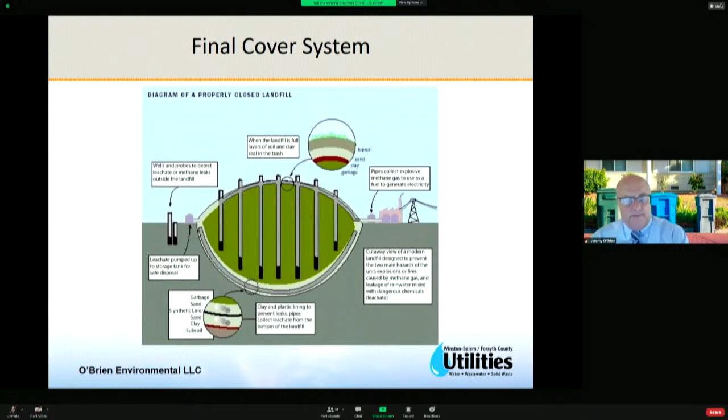The good news is that our SWANA research, in the report I mentioned earlier, found that traditional final cover systems, if properly managed, can last for very, very long periods of time — on the order of thousands of years. So that's really a good news story: if you close this correctly, you should be protecting the environment for many, many generations to come. Next slide, please.

Well, what about post-closure care? Now you close the landfill. What federal and state law requires is that you monitor what happens at the site for 30 years. So if you closed in 2041, for the next 30 years, you would monitor the groundwater at the site, the leachate, landfill gas, and how the site is settling.

The purpose of this time frame is to make sure the landfill becomes what they call functionally stable. That's not a psychological term, that's a physical term — functionally stable during the 30-year period. What does that mean? Since water can no longer get into the waste, waste biodegradation ceases, and once that happens, the landfill gas generated will be minimized, and the landfill settlement will be minimized. So you think of this landfill, it's kind of just settling down.

All the landfill gas is stopping being generated. A little more leachate is being generated, minimal leachate generation. So at the end of that process, it's kind of done, if you will. It's kind of going into retirement, ready for retirement. All the processes have ceased. And I want to say that the utility department is also accruing monies for a reserve fund to cover these post-closure costs.

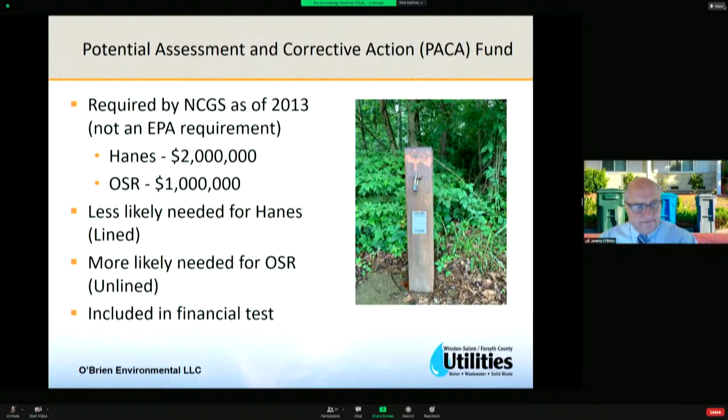A restricted fund is not being accrued for these long-term costs, which are way in the future. For a 100-acre site, we estimate it would cost just about $25,000 a year. These aren't large costs, they're kind of minimal. You send someone out to walk the site every year or so, fix any potholes, that type of thing, and make sure the final cover system is functioning correctly. The good news is you can likely cover these costs with interest earnings from the post-closure fund.

To help the Solid Waste Division track post-operational costs with Hanes and OSR, O'Brien Environmental has developed this CPCC fund model. The model is used by the Utilities Department for budgeting annual contributions to the Hanes and OSR closure and post-closure funds, and it's also used by city finance to provide cost estimates for the local government financial test. A model like this is needed because each year the inputs change a little bit, like the amount of waste disposed in future years, which modifies the service life of the landfill. Costs also change based on inflation, so there's a need to rerun the model at least once a year to update it.

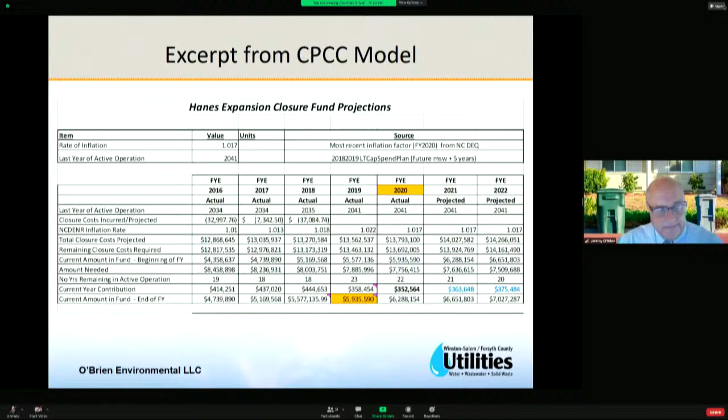To summarize these costs and give you an idea of how big they are, when we looked at the entire Hanes landfill, closure costs came out to $1.32 per ton of waste disposed, post-closure 79 cents, PACA cost 21 cents, for a total of $2.32 per ton of waste disposed at the site. Most of the costs are associated with closing the landfill, about a third with post-closure, and a little less than 10% with PACA. There might be some additional costs for long-term management and beneficial reuse of the site. That $2.32 is about 8% of the current cost of disposing of waste at Hanes, so it's not a huge cost, but it's not insignificant either.

I hope we're at the fun part of the presentation. These landfills have served the cities of Winston-Salem and Forsyth County well for many years. The question for the commissioners is, can the closed landfill continue to be a community resource? It's really centrally located, and that's important for the city of Winston-Salem's waste collection trucks. Should it continue to be used as a recycling center, a transfer point, a waste drop-off center? That's one excellent use if you decide to do that.

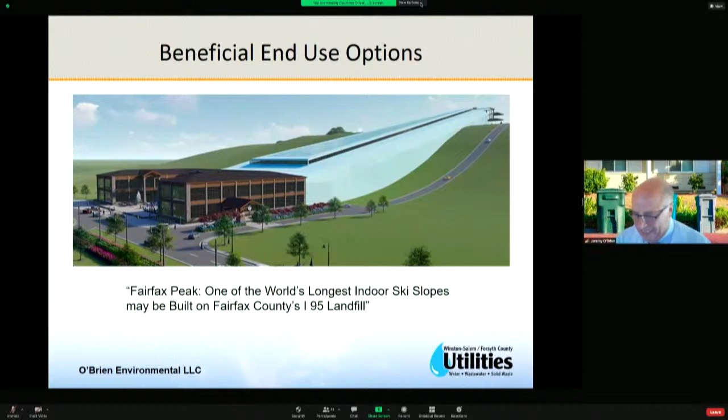But somehow skiers have discovered our industry, so you may get some developers approaching you to do something like that. Okay, Courtney, next slide please.

Just to summarize, closed landfills will require maintenance and monitoring for many years, both during and well beyond the 30-year post-closure care period specified in the regulations. It's just the nature of the beast - it's something we're going to have to take care of for many years. The good news is that only a minimal level of care will be needed once the landfill becomes functionally stable.

Post-operational costs, as I've hopefully demonstrated, represent about 8% of the total costs of landfilling waste. The utilities department is accruing funds to cover both the closure and post-closure costs for Hanes and OSR, and to date, over $20 million has been accrued. I think that's a tremendous achievement, and future residents will be glad that you're well on your way to covering these costs. Finally, additional funds may be needed for long-term management and beneficial end uses, especially if you decide on the ski slope option. So with that, I'm finished my presentation, Courtney.

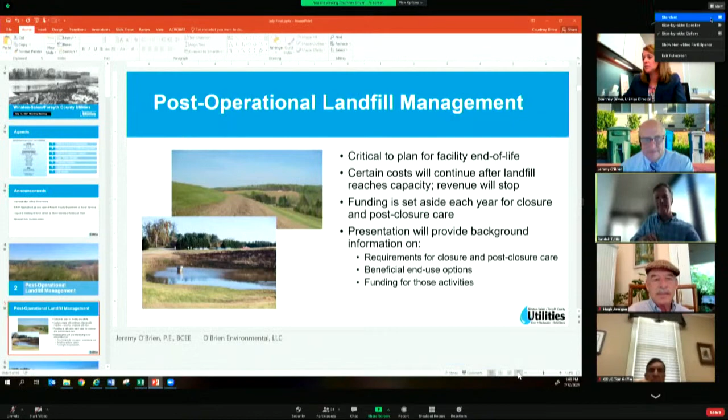Okay, I'm going to turn it over to Mike Stover. Thank you, Courtney. Good afternoon, commissioners. So far this calendar year, Todd's group has issued 31 water and sewer permits for an infrastructure value of over $4.6 million. This slide shows the breakdown of mileage between water and sewer permits - about 5.7 miles of water has been permitted versus 7.3 miles of sewer.

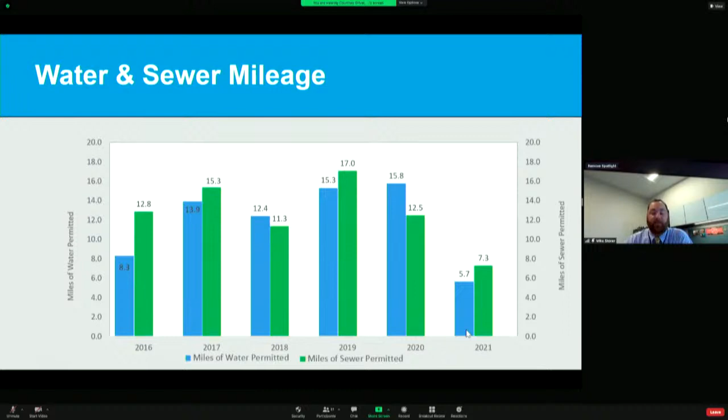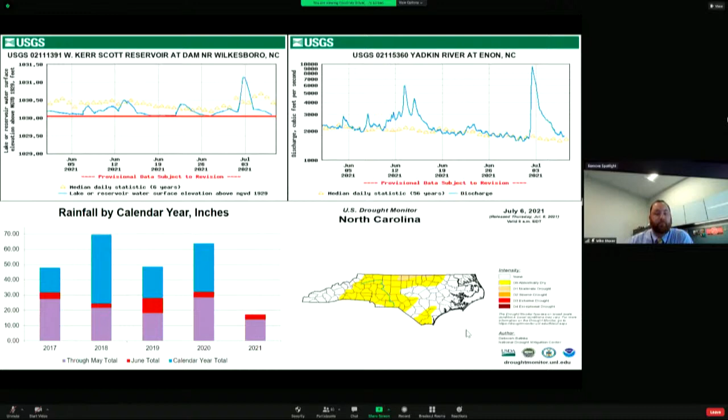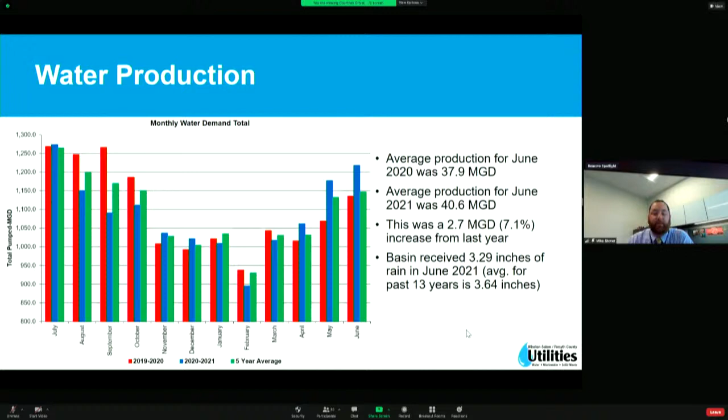Here's the drought monitor. As you can see in yellow, the middle part of the state is abnormally dry. In June, we had 3.29 inches of rain, which is slightly below average, but we are substantially below where we were this time last year. Water production in June was really good compared to the 5-year average and compared to last year - our water production was up 2.7 million gallons per day, or about 7% over this time last year. Here's the fiscal year to date, still slightly below the 5-year average and below where we finished last year.

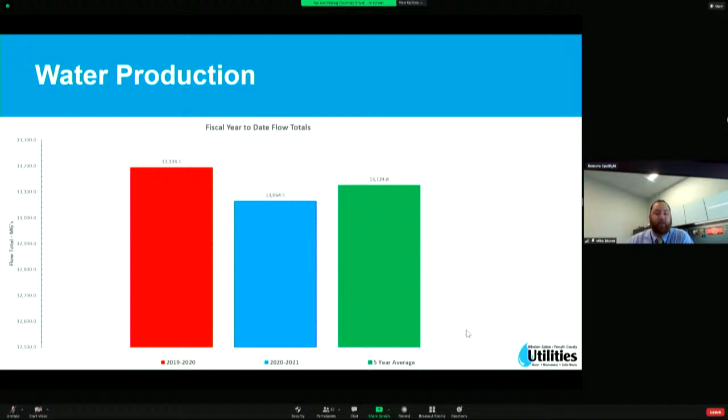Water quality sampling for the month of June - across the 3 water plants, we conducted over 26,000 water quality samples and fielded 61 water quality calls. No violations. I would like to point out we did have 1 positive total coliform in the distribution system at one of our regular sampling sites. We went back 24 hours later and tested again and got a negative result.

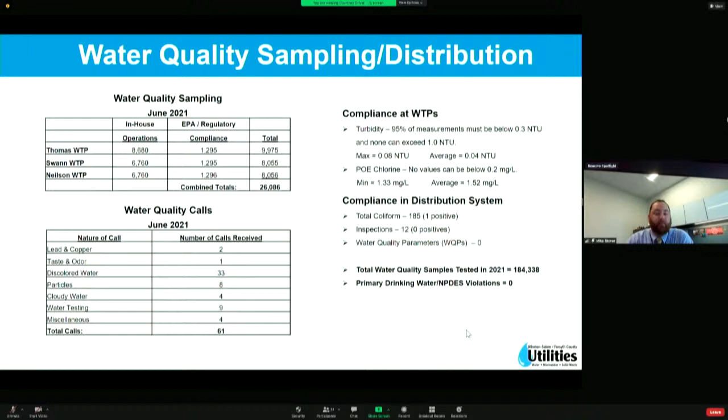Collection system update. We have not received the report for June yet, but we did get the last couple months, March, April, and May, since we presented this last. For May, we had 1 notice of deficiency, 3 notice of violations, and 0 intended enforce letters. We've gotten a couple of intended enforce letters over the past couple months, dating back to December, when we had a large spill on our Tanglewood force main. The penalty was about $5,800, which we paid.

SSO per 100-mile chart: we had another record year. We finished exactly where we were last year, 74 SSOs for 2021. Considering the pandemic and a lot of people working from home, our field operations still came in every day. They were short-staffed, and we've had staffing shortages on our contractors as well. It was a remarkable year.

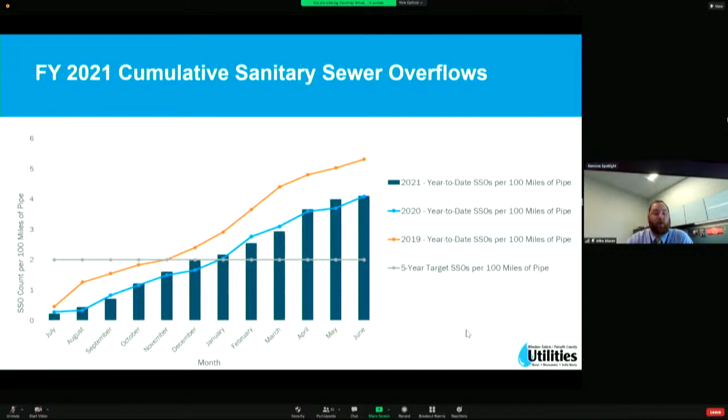A large part of that is we had a good month in June. We had 2 SSOs — one was a pipe failure, and one was fog, roots, and debris related — way below our 5-year average mark.

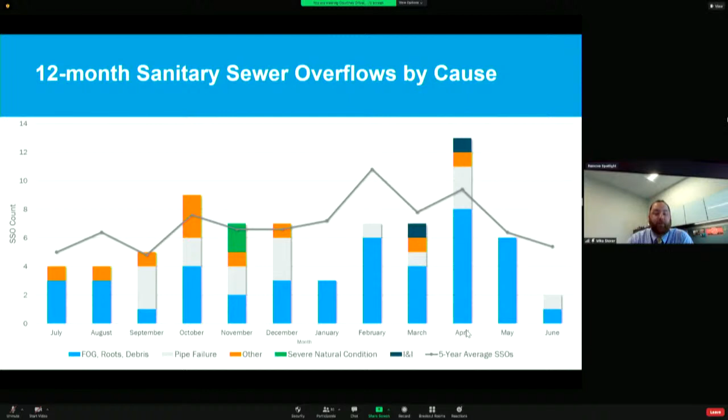I'd like to point out we did recently renew our collection system permit, and it runs through, I think, 8 years, through 2029. That is a huge achievement. Kenny Atkins and his staff have worked tirelessly to get that permit prepared, and that was done well in advance of the deadline.

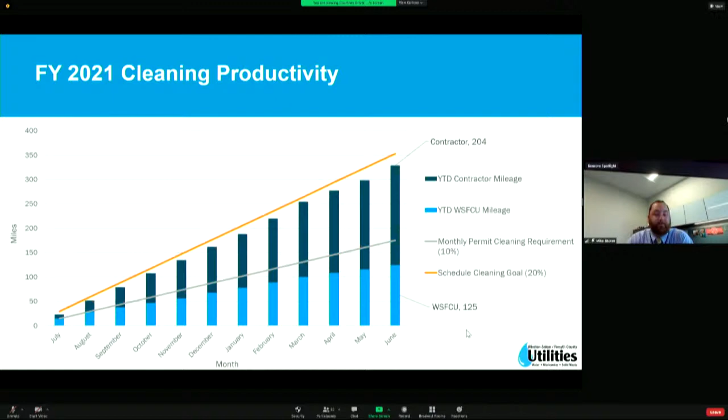Items 5 and 6 on your agenda are the Neilson modernization project. We've briefed you all on this several times in the past — March of 2019, and I believe February of this year before the capital presentation. As a reminder, the Neilson water plant is our largest water treatment plant, 48 million gallons per day. There's only been 2 major expansions since the plant was originally built in the early 60s, and I believe those 2 expansions occurred in the 80s, late 80s.

This project includes condition improvements for aging facilities, process improvements, obsolete failing equipment replacements, providing some redundancy and reliability, and safety and operational improvements. It does not increase capacity, though.

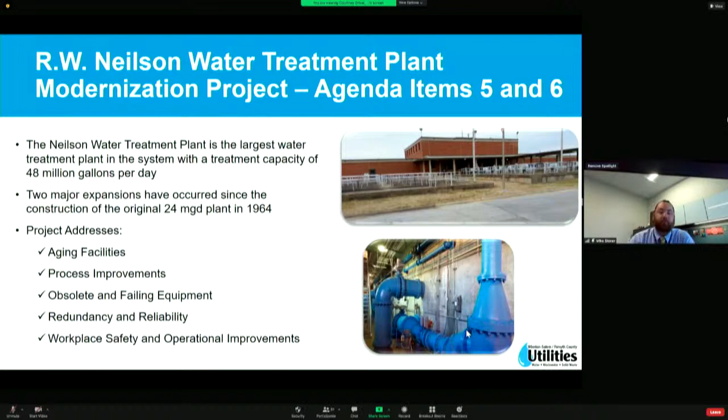Here's a snapshot of the budget. The commission approved an additional $40 million in the May commission meeting to go towards this project, for a total appropriation of $121.87 million. So far, for preliminary design and bidding, we've spent a little over $5 million. Item 6 on your agenda is the construction administration contract, $7.247 million. Item 5 is your construction award for Oldman Schutte, a little over $107 million, and then we left $2 million in there for contingency in case anything arises during construction.

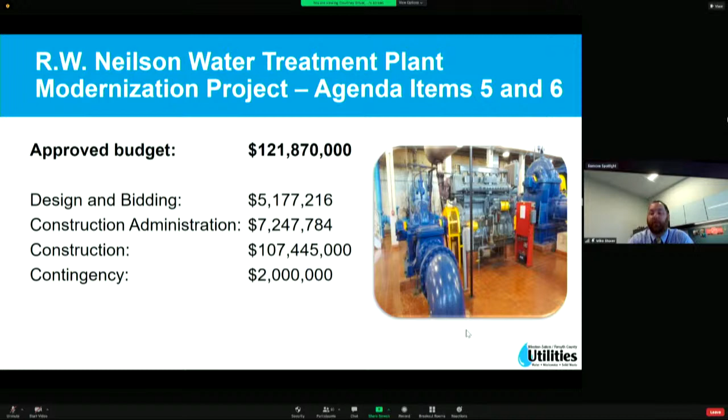It was going to be done by CITI anyway as an allowance, and rather than having the contractor go through CITI and add their markup, we already have an existing contract with CITI. We removed that from the Neilson project, and we're going to do that completely separate through the water treatment upgrades program, similar to how we did Swann and Thomas last year.

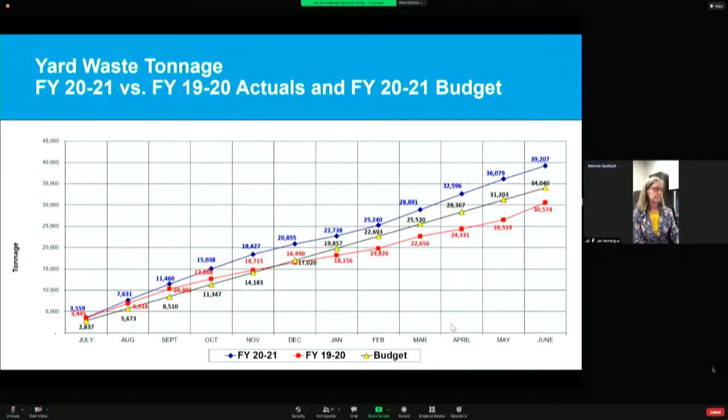That's our usual tonnage update for the solid waste facilities. And we had one more thing that we wanted to discuss with you today.

This map shows various parcels surrounding the Old Salisbury Road landfill. And let me walk you through what the map looks like. The red boundaries, the parcels that are outlined in red, are the ones that are currently owned by the city.

So the cross-hatched one that you see at the entrance to the landfill is the 1.1 acres, I think it was, that was on the agenda last month for discussion, where there's a couple, a developer that would like to purchase that property. That item was tabled, but we wanted to show you where that's located relative to the rest of the landfill and make you aware of another parcel.

It's outlined in orange on this map that has become available for sale. It's about 32 acres and it's priced right now at $249,000. It's immediately adjacent to the landfill, as you can see, and would provide another access to Old Salisbury Road in that rectangular piece that goes out and has road frontage.

So it's currently zoned residential. As I said, they want $249,000 for that. And we feel like there could be some benefits to owning that parcel that's adjacent to the property that the city already has. It would provide a buffer from the landfill operations to the nearby residential areas.

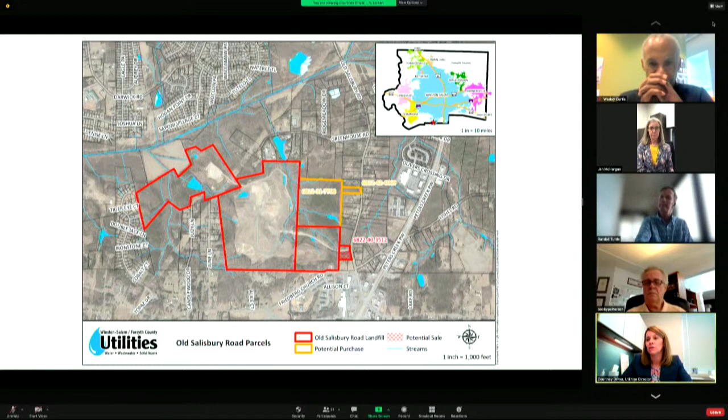Courtney, what do you need from us? Well, I guess I need some direction on, does the commission want us to bring it back as an agenda item next month?

I think I'd be amenable to that. I'd like to bring it up as an agenda issue. I know the one reason we tabled it was because Jan was not available. And thank you, Jan, for sending me all that information on the hydrogeologics, which made me feel a lot better because I wasn't sure about it then. But I've got a little more information as far as groundwater flows and all. I feel a little bit better about it now. Plus, certainly would like to bring it to the commission about the purchase too.

So if I may suggest, let's separate the yellow box from the red hash box. Yes. I'm sorry, Chris, or someone else that wanted to say something. Yeah, it's Chris, right? Randall, right as you were saying that, I was saying that the sale makes this even more attractive because this could help pay for a good part of that purchase. So that intrigues me and makes me more in favor of this.

I know it would be two different agendas. I had an unstable connection, my internet broke up, so could you say that again? I know it would be two different agenda items, but I would be interested in seeing both of those on the agenda, both the sale of this piece of land and then the purchase of the other one. Me too. I'll second that, or third it. Okay.

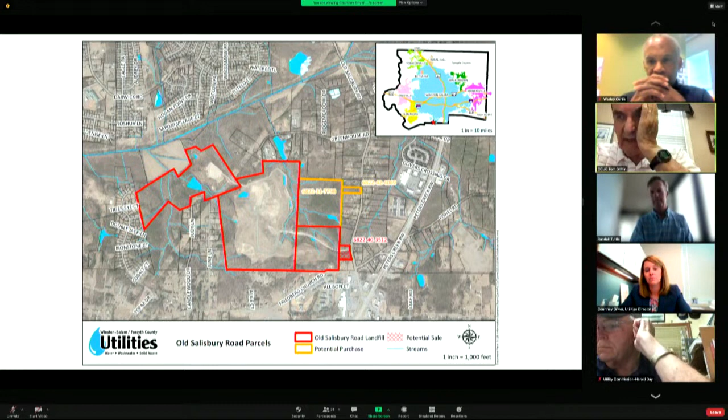Courtney, make sure that we see the language in the document related to the item we're looking at selling, possibly related to the buffers. I'd like to know all of the details about what's going to be in the actual legal document, as to the wording that's going on there. That's sort of like Wesley said a while ago. Yeah, we feel good to start with, but somebody 20 years from now has heartburn over the thing, and we're sitting here trying to figure out how to solve that problem 20 years from now.

Yes, we can do that. Okay, and I would like to echo that.

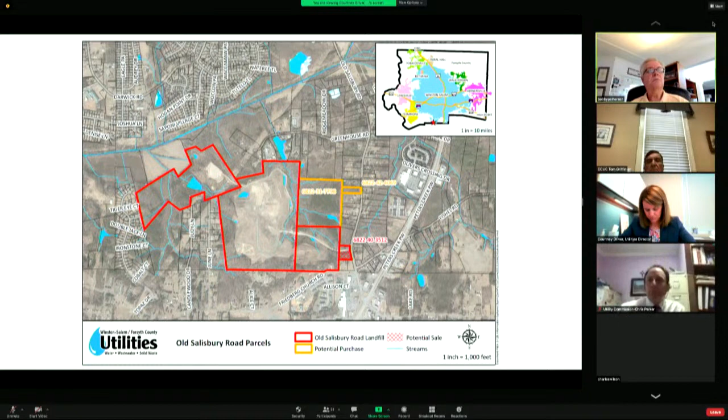Do you know what the uses will be, or how you're going to try to market the uses?

It would typically be the typical split you would see in a retail center. I'm sure there'll be some service type uses. There'll probably be some straight up retail. There may even be some food related items, et cetera. So a typical mix, I would think, you would see in a small retail center.

And this is Chris Parker. I'm assuming, since this is so close to Peters Creek Parkway, that we do have sewer out to this piece of property.

I'm sorry, Mr. Parker, so you're saying you want to know if we have sewer in Old Salisbury Road? No, just that piece of property that you're pointing out that we're thinking about selling. Because I would imagine if we don't have sewer, then that expands what's necessary. Do we? Especially if you have a restaurant.

Yeah, I don't know off the top of my head, and we'll try to get that for next month too, unless Mr. Patterson knows. The Davidson County line is very close, so I don't know if we serve that area or if that's Davidson County. I'm not sure right now.

We do have a survey of the property, and I know there's some fairly significant development immediately across Friedberg Church Road. There's a retail center there, and there are 2 restaurants immediately across Friedberg from us. So yeah, I don't know whose service territory those fall in. We'll have that information as well. I'm just not sure - there are some properties that we serve outside of the county line.

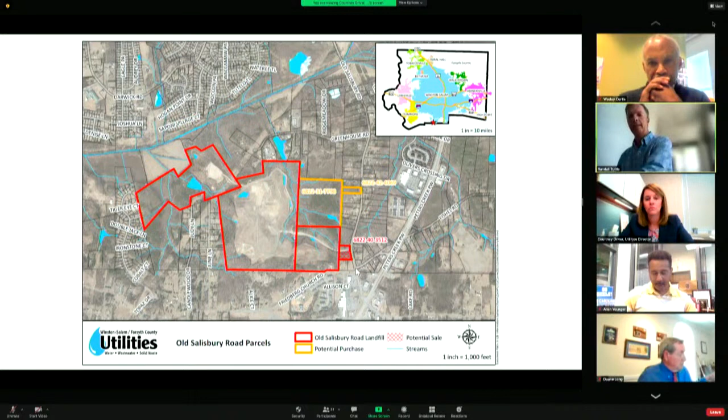Want me to just take it to the agenda items here, Courtney? Yes. Okay, item 2 is the one operations item, which is consideration of a resolution authorizing execution of various agreements regarding proposed water and/or sanitary sewer improvements to be installed within various developments. This month, we have 3 developer agreements with a total of $315,300 for water and $330,090 for sewer.

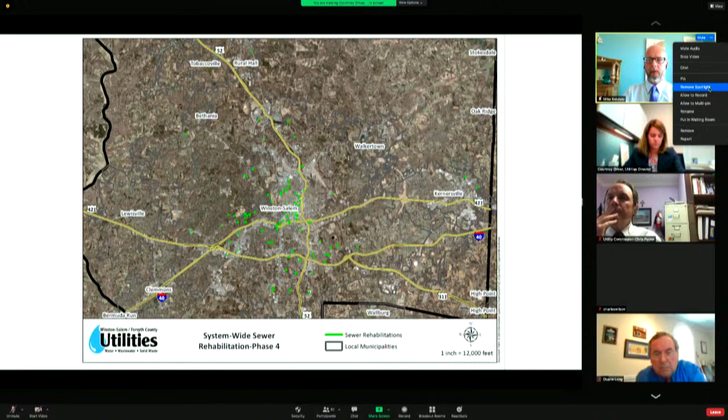Moving on to item 4, consideration of a resolution awarding a contract for system-wide sewer rehabilitation phase 4. Bids were received June 8th for this project, which involves a variety of sewer-related work at multiple locations throughout the collection system. Bids were scheduled for May 11th, but fewer than 3 bids were offered, so the project was re-advertised. At that time 2 bids were received, with KRG Utility, Inc. the low bidder at $4,340,786.25. KRG has agreed to subcontract a minimum of 5.05% with certified minority-owned businesses and 5.02% with certified women-owned businesses, meeting the project goals of 5% and 5%. It is recommended that a contract be awarded to KRG Utility, Inc. in the total bid amount of $4,340,786.25, with $225,000 available for contingency if needed. The engineer's estimate for the project was $4 million.

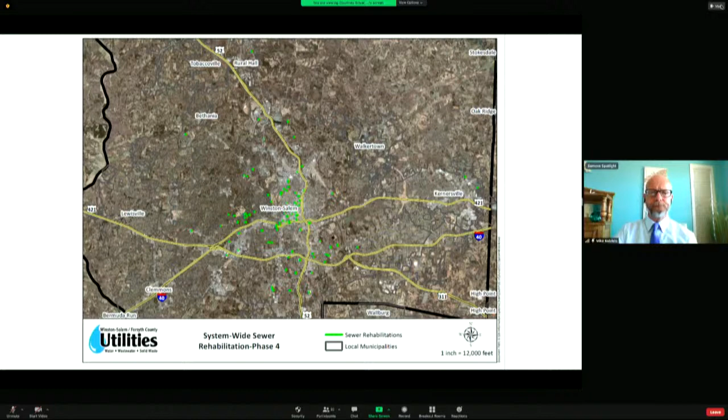Items 5 and 6 are for the Neilson Water Treatment Plant Modernization Project, construction and construction administration engineering services for Black and Veatch, which Mike Stover has already discussed. Are there any additional questions regarding those items?

Item 7, consideration of a resolution authorizing a sole source purchase order to Evoqua Water Technologies, LLC for the Muddy Creek Wastewater Treatment Plant. The plant is equipped with 5 secondary clarifiers, which are sold and serviced exclusively by Evoqua. Staff is seeking to procure a replacement gear drive unit for this critical process area that has failed after 40 years of service. Staff requested quotes and received a quote of $69,000 from Evoqua to manufacture and install a new circular gear drive for the number 2 secondary clarifier. Staff recommends approval of a purchase order in that amount to Evoqua Water Technologies, LLC.

Tom Griffin. Yes, Mr. Griffin. 4 years, it failed in 4 years, is that correct? 40 years. 40. Okay, thank you. 40, sir. Yep. Yep. Thank you.

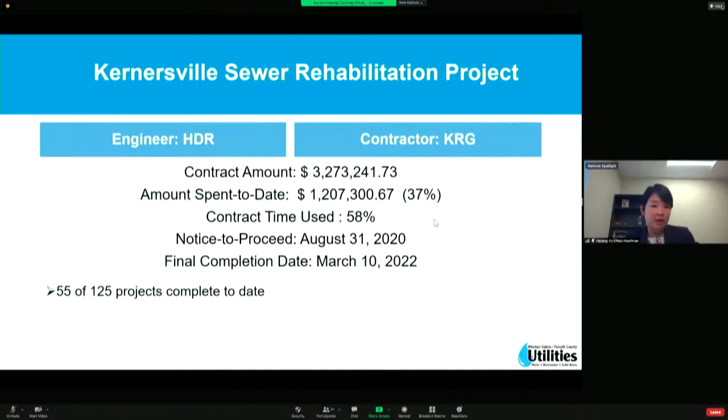I hope you all had a great weekend. So first up is the Kernersville Sewer Rehab Project. Notice to proceed for this project was August 31st of last year. So far, we've spent about 37% of our contract amount. We've completed 55 out of 125 projects to date.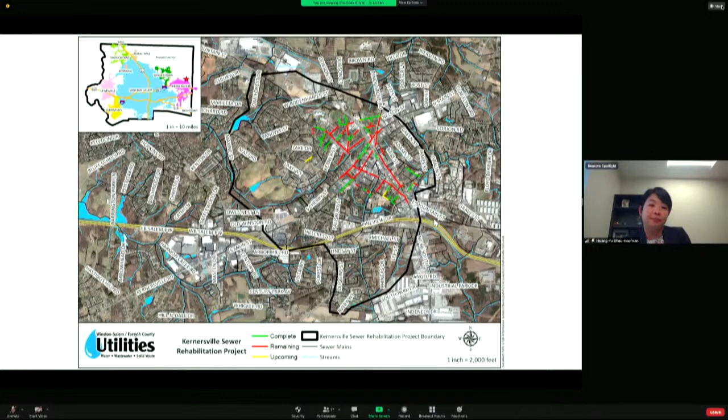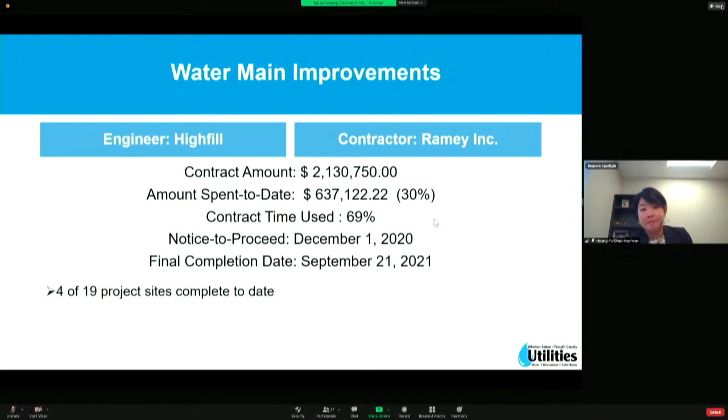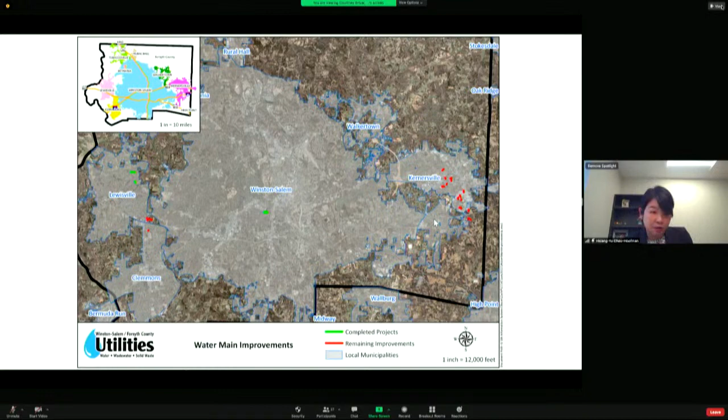Over here you can see the project map. All the little dots are each different project site. The green dots are what we've completed, and you can see that we still have a lot of red in Kernersville and Lewisville. We'll be working on those.

Roswell Lift Station. So far we have spent about 92.4% of the contract amount. This project is almost complete. The force main installation has been completed, the gravity sewer line is about 97% complete, and the lift station itself is finished.

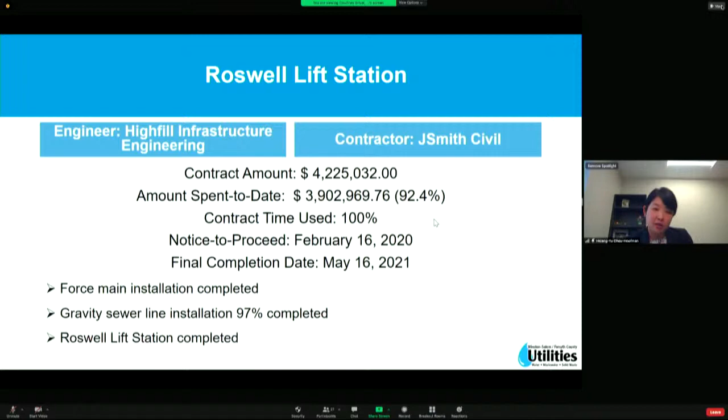And here is the progress map. On La Plata Drive, that is the last sewer line they need to install, and then what's remaining is just demolition of the existing lift stations.

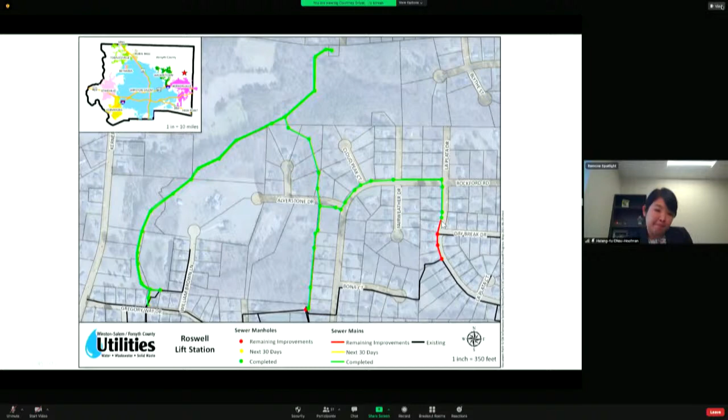Here you can see, this is looking from Alverstone Drive. This is the site after it's been seeded, the site restoration. And here is another view from Alverstone Drive, looking down the project corridor.

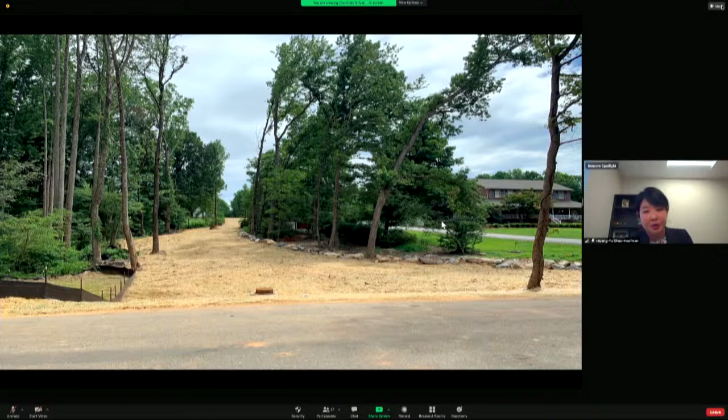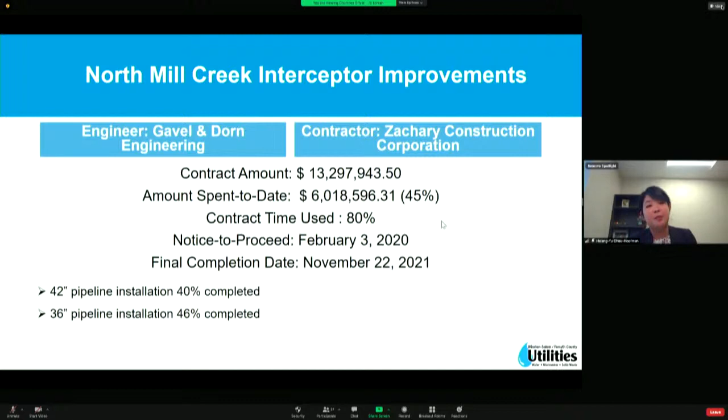North Mill Creek project, notice to proceed was February of last year. Should be completed by November 22nd of this year. The 42-inch pipe has been 40% installed. The 36-inch pipe installation is about 46% complete.

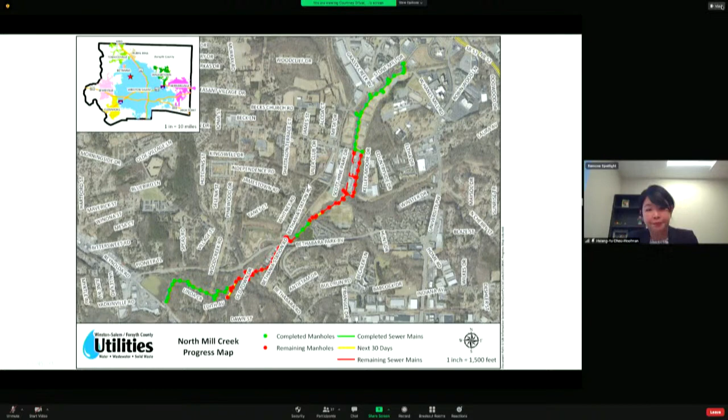Thank you very much. Any questions for me?